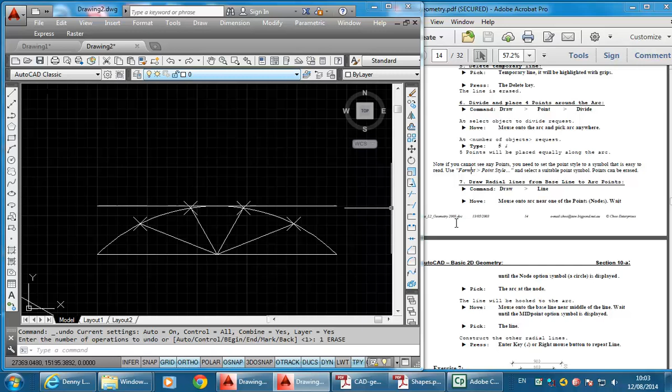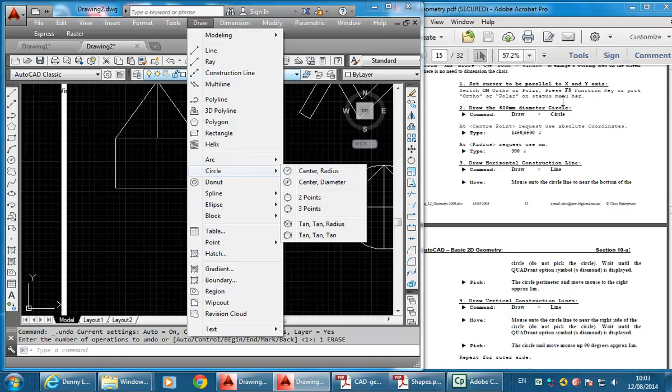And then I'll go ahead and just do the chair because I want to get the steps for the array recorded for you. And so it's over here on the left hand side below the second exercise, that elevation. And you can see it again begins by drawing a circle. And you're not given the option here, but again, if it doesn't give you the option, just choose the first one, set a radius.

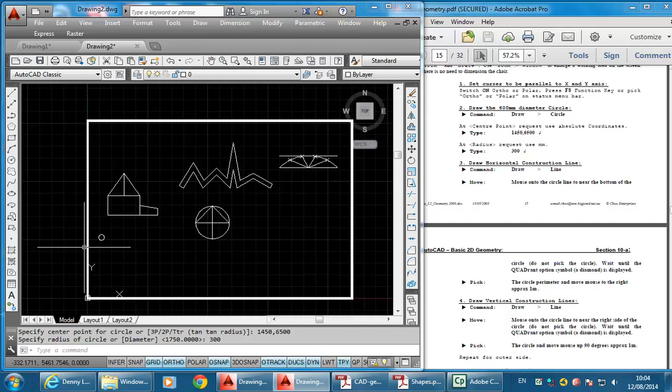And then 1450, comma, 6500 is the centre point. The radius is just 300, and so that'll make it seem fairly small compared to all these other things. That looks like it's a very small object, but this is the first one you're drawing its real size. That is the size it should be in real life, and so that's normal.

Then you simply need to draw some lines either side of that and from the bottom as well. So drawing a line on the left hand side, you see again it will snap to the quadrant, and then you can come up. Yep. Make sure your object snaps on. Yep, yep.

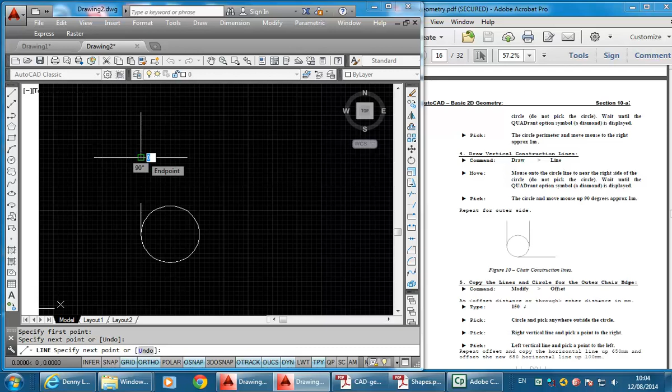Okay, so enter to finish, enter to start drawing a new line, clicking a point and then clicking somewhere above. You'll see in the notes it tells you to draw about a metre above, but really as long as it looks something like this, the line doesn't really matter how long those lines are. I'll just do one more at the bottom.

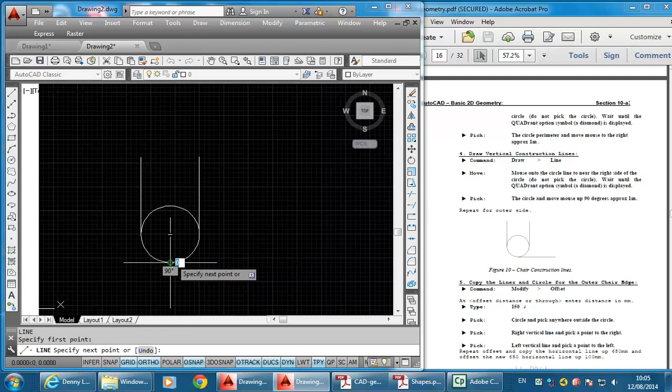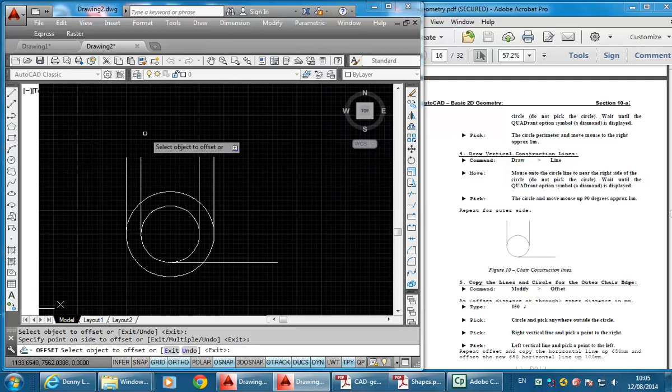And now using offset, you can see the distance there is 150. So then you need to choose the circle and click somewhere outside, and then the two lines either side, and click to the right for that one, and then this one to the left. And now the horizontal line, I want to offset a different distance. So it's first 650 and then 100.

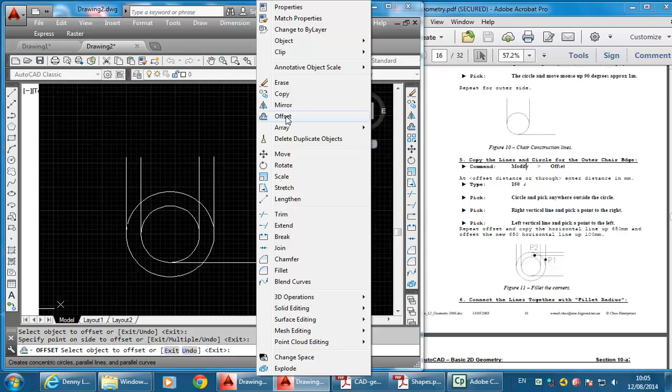And so to change the offset distance, you need to start the command again. Choose offset again from the menu. Press enter. And so it'll ask me for a new distance. That's going to be 650. Enter. Choose the line. Click somewhere above.

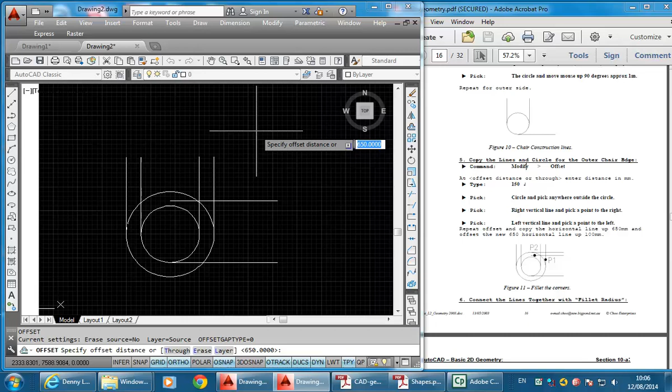And then I could either choose offset again from the menu, or the shortcut is to press enter twice, complete the command, and then repeat the last one. 100 is my new distance, so I'll type that in and then choose my new line, click somewhere above, enter,

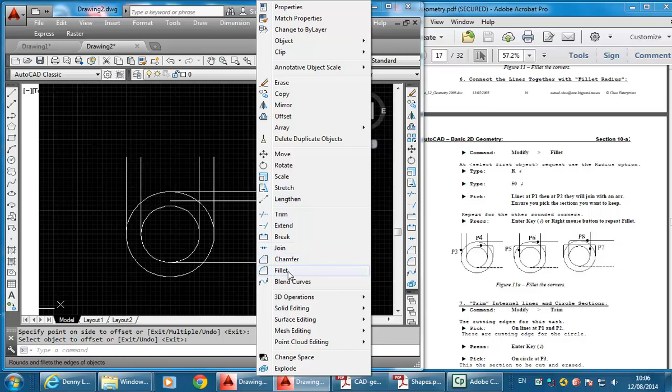and then using fillet, this time I'll set a radius. So again, once you choose fillet from the menu, you'll see some different options. So I'm going to this time type R, just like it says in the notes, R and then enter, 50 and then enter to give a radius.

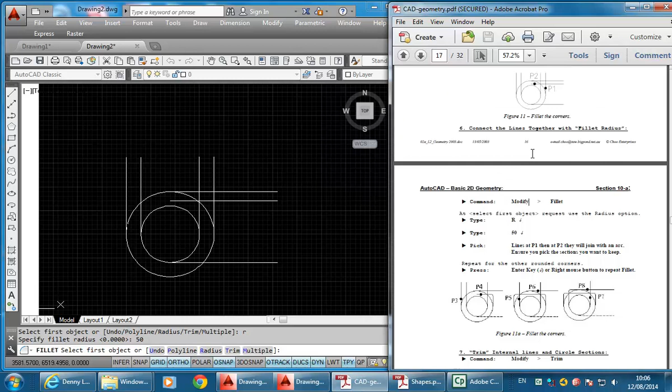And this time when I choose the lines, again just looking at the order, you can see here point 1 and point 2 are these points here, so on the side, and then the lower of those two lines. Yeah. No, no. And so then you can see it's put a rounded corner there.

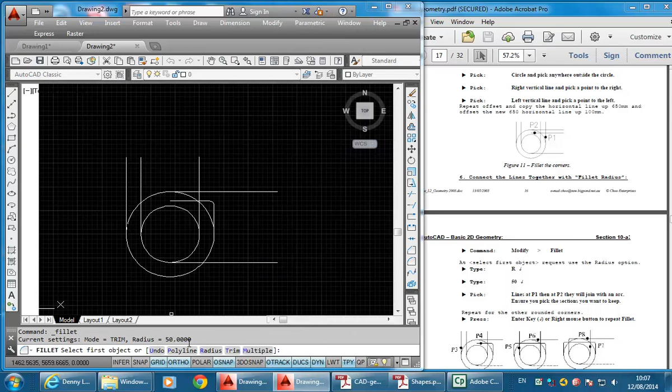And so now I can choose fillet again from the menu, and you'll see it's kept the radius. So it's still at 50, so I don't need to set that each time. And then this time point 3 and 4. So here, the left-hand side is where point 3 is, and then that same line again, the lower of those two lines.

Again, I can choose fillet from the menu, or you can use the enter shortcut. So this time, point 5 and 6. So here, choosing the vertical line and then the line above and to the right. Again, fillet from the menu, and we'll choose point 7 and 8. So again, the vertical line here, and then notice where these points are.

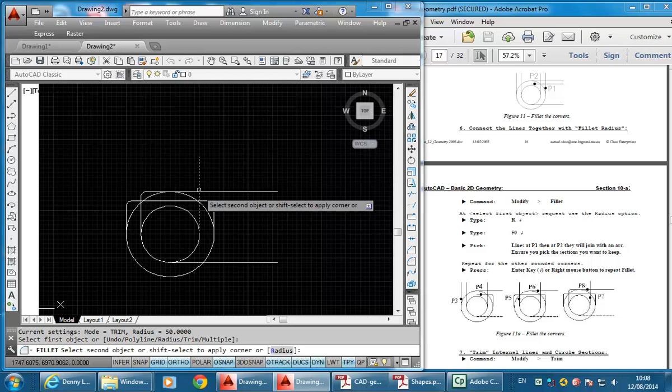You can't just choose anywhere on the line. Zooming in, you can see if I choose to the right, it's going to go that way. I want it to go to the left instead. So roughly where point 8 is there. And then to finish that off, you need to just trim away the lines that you don't want to get that chair.

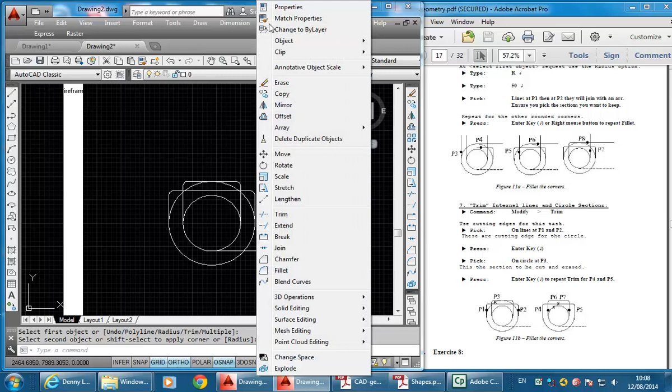So again, just following through the steps in the notes with trim on the modify menu, you can see the first points you need to choose are where you want it to cut. So the left hand side and the right hand side, point 1 and point 2. So here, that's point 1, this is point 2, and that's selected those two lines.

I don't want those lines to change, so I'm not trimming those lines, I'm using these lines to cut other things. So I've finished selecting cutting edges. That's right, exactly, but now I'll press enter. Yeah, and that lets it know I've finished selecting the things I'm using to cut. It's like putting your blade or putting your scissors somewhere.

And logically that's what you have to do when you want to cut something. And now I can choose this circle and it'll cut back to those lines. Otherwise you'll get leftover lines and other things in the way. Okay, so now I want to trim the inside. So I need to use different cutting edges.

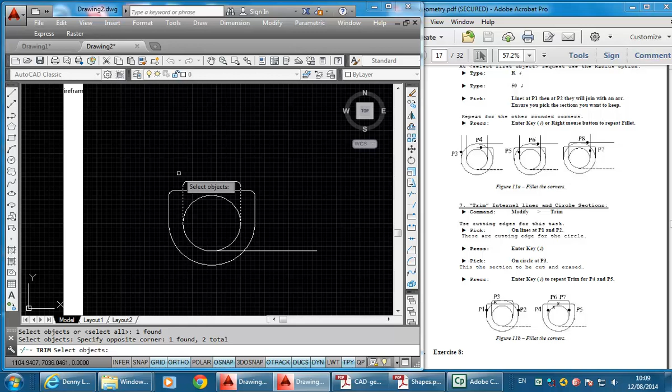So again, I'll choose trim from the menu and choose the inside of those vertical lines, these two vertical lines coming off that inside circle. So now I've finished selecting cutting edges. I want to trim my objects now, so I'll press enter to let the program know, and then I can choose the circle and the other line to cut them to those same edges.

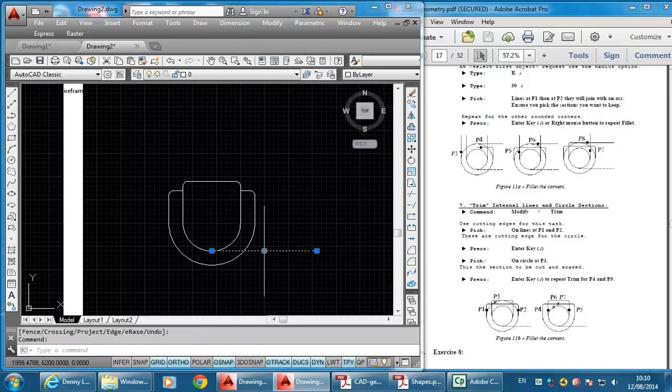And then finally, we want to get rid of this line at the bottom. Now, there's no point trimming that, I just want to get rid of the whole thing. So I'll press enter because I want to finish the trim command. And then the easiest way to delete something is to make sure there's nothing running, no command, so it should say type a command at the bottom. And then you can click on anything and hit delete on the keyboard.